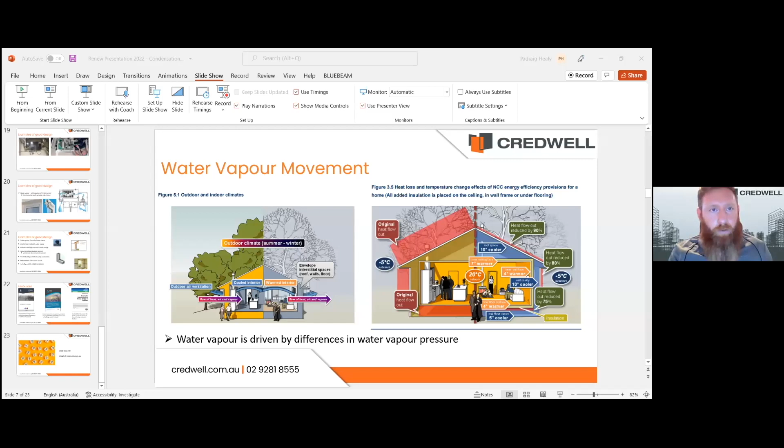So let me just bring up my slides and go through that with you guys. My name's Padraig, Paddy for short, or just to make it easier for everyone to understand and save me from explaining it numerous times, or Patrick even, the patron saint of Ireland.

So I'm director of Credwell. We started up in 2000, I came here in 2012. We started Credwell ESD in 2018. I was working here in the same capacity from 2012 to 2018 and decided to join a former director who created Credwell. We also work in the BCA access field, which is basically helping certifiers make sure the houses are designed correctly with BCA and access reports.

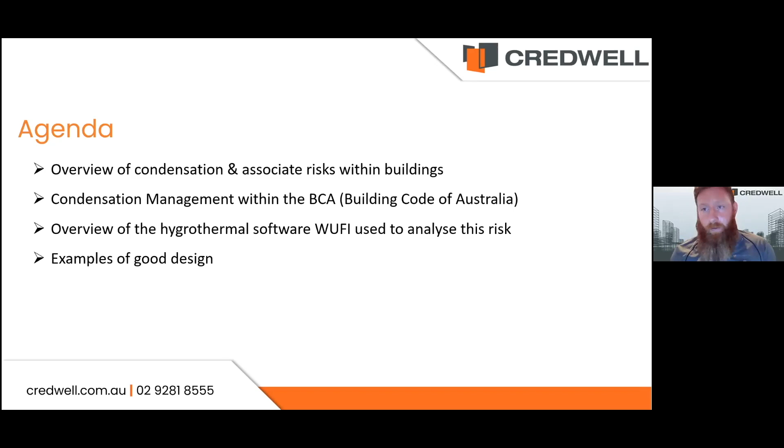So going on from that, the agenda today is basically an overview of condensation and the risks associated within buildings, what that means in the construction code. The construction code is now geared towards that - finally, in 2019, they brought in a section, F4.6, to deal with condensation. Before that, there was nothing. I will overview the hygrothermal software - I specifically use one called WUFI to analyze this risk in new buildings - and I'll go through a couple of examples of good design for you guys.

So to start it off, what is condensation? I think everybody knows what that is. It's basically where moisture-laden air meets a cold surface, and it gets to a point where it hits its dew point, and then that vapor in the air turns into condensation or liquid.

So essentially, that's easy to explain, and everybody knows examples of that. You see it on windows, for example, condensation written on that window. I remember in Ireland 25 years ago when I was in school, and it was very warm inside the school and very cold outside, we had these issues, and we were drawing on the windows in our school because of the vapor condensating on them, and they were single glazing at the time.

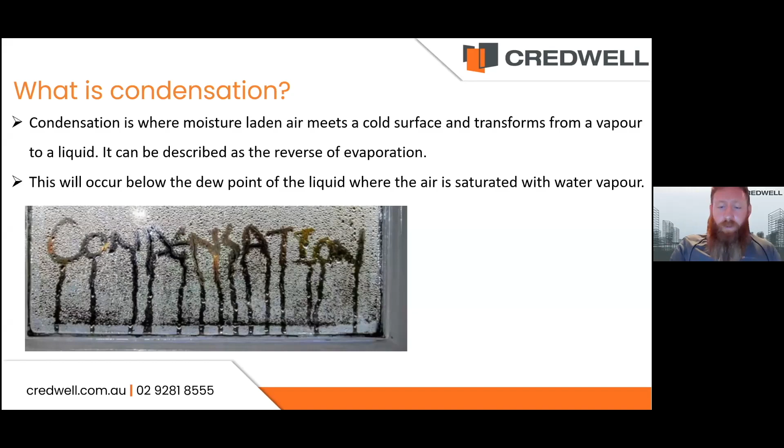So that's just a brief overview of what condensation is. There's two different types of condensation, I would say. Obvious condensation, so stuff you can see physically in front of you, like what I described on a window pane. Maybe on a wall, after a while, you'll see it build up behind it, a physical manifestation of condensation.

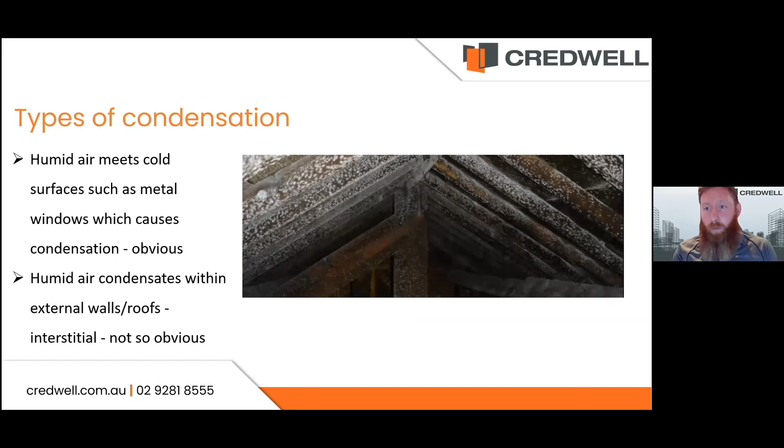The other one is not so obvious, when it gets into the wall and hides there. Water vapor gets through that wall and then condensates within the wall. That's called interstitial condensation, and that's the one we're worried about in buildings specifically. It's not something you'd see going into a building, but a lot of buildings that have been built may have interstitial condensation and we wouldn't know, because we're not sticking our head in walls every day.

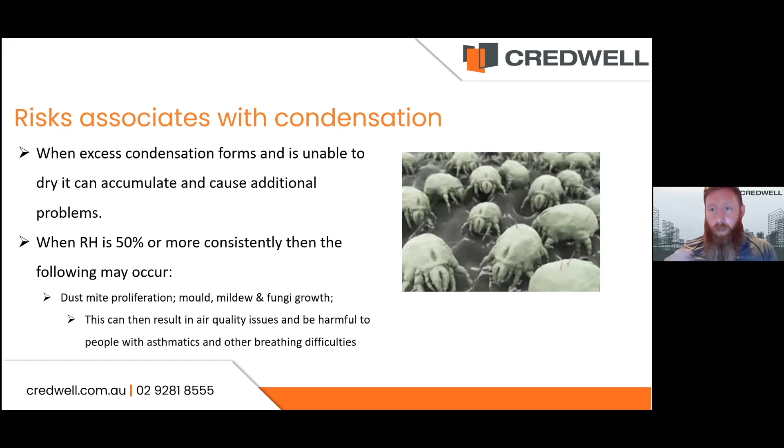Another issue with that, so mold, what's the problem with mold? Mold and fungi, if they get into your airways, can cause problems. If you are susceptible to breathing problems, you may have issues with mold. You're talking about harmful bacteria and fungi getting into your airways and causing issues. Asthma would be an example of that, it can cause or develop issues like that, or make them a lot worse.

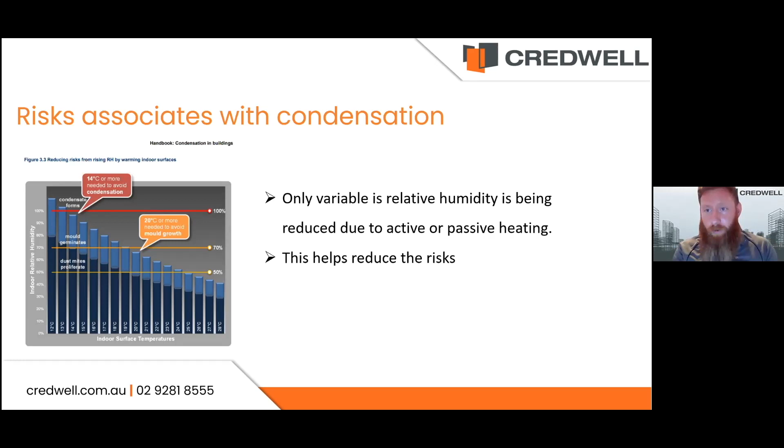Moving on. So I'd like to give an overview, as I said, pictures are better. These two examples are actually within the guide for condensation within the BCA or the NCC. These are actually in handbooks, which I give a link to at the end for anyone to look into.

You can see here, water vapor is driven by differences in water vapor pressure, so obviously like wind, it moves from places of high to low pressure. It's the same with water vapor, it wants to get in or out depending on the pressure difference. So you can see down here on the left-hand side, a cold interior or a warm interior.

When it's a warm interior inside, it basically wants to get out, and it's the opposite on the cooled interior—it wants to get from the outside to in.

The problem recently is we've been sealing up our buildings more and more to become more energy efficient. We're putting insulation within the walls and the roof, and adding better sealing. That wasn't the typical design of Australian buildings in the past, where we had quite a lot of leakage, but that was let go because it was uncontrolled infiltration that was helping towards passive cooling. Now, to be more energy efficient and meet the 2030 Paris Agreement, we're striving towards more building sealing, more energy efficient buildings, and that's why we're having condensation issues as a result.

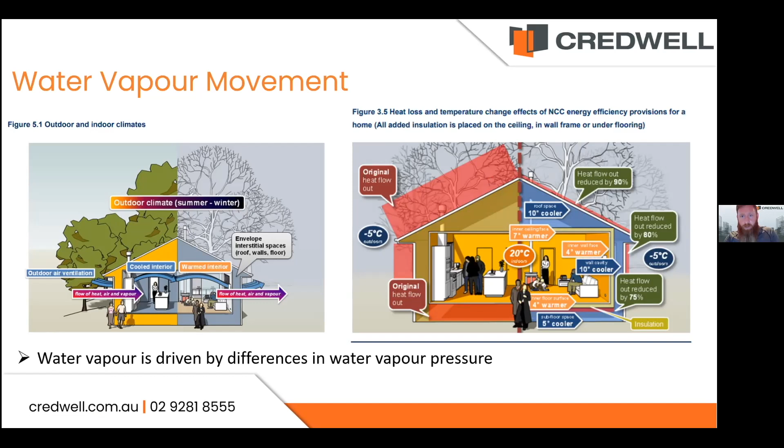So what causes water vapor? Essentially in our house, dryers, washing machines, taps, us breathing and sweating, transpiration, cooking and showers give off a lot of water vapor, and that water vapor in our house becomes humid. It wants to get out now, and if we don't give it a pathway to get out, it's going to have problems. It's going to get stuck in our walls, and it's going to condensate on our windows—this is the issue.

So we can't tell people to stop or minimize their dryers, or say get condensant dryers—I can't say the word, but I think you know what I mean. And you can't say to people to stop having showers, etc. So we need to mitigate these issues.

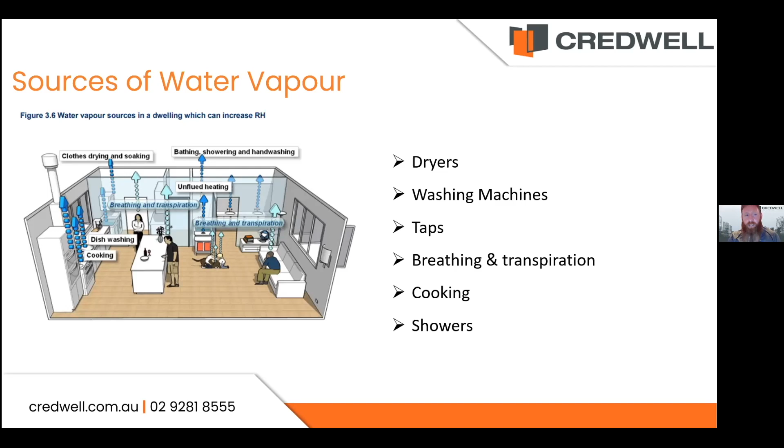So basically, the BCA in 2019 brought in Part F6 condensation management and Part 3.8.7. The difference between those two is Part F6 is for Class 2, which is units, for example, and Part 3.8.7 is condensation management within houses. So it's like everything else in the BCA—two codes, one for houses and one for units/bigger buildings, Class 2 to 9, anything from offices to shops. So it brought in this objective: reduction of risks associated with water vapor and condensation in buildings.

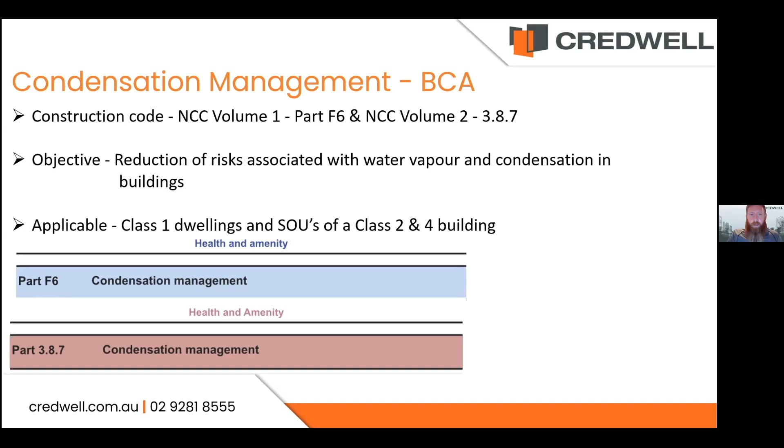So what they did was bring in two major items. A pliable building membrane, if installed within a building, should be a vapor permeable membrane in climate zones 6, 7, and 8. There are climate zones in New South Wales and Australia in general—I think there's 8 or 9 in New South Wales alone. But 6, 7, and 8—6, for example, is Western Sydney, 5 is the eastern suburbs. When you get to Bankstown and go west, that's when we're talking about climate zones 6, 7, and 8, which are down in the colder regions.

That vapor membrane needs to be a vapor permeable membrane—I'll explain exactly what that is a bit later. It also should be located on the exterior side of the primary insulation layer. Your normal weather resistive barrier that we all have on our buildings, that you see when a building's been built wrapped around it—that's your pliable building membrane or water resistive barrier, but it also needs to be vapor permeable now in these climate zones. So Bankstown West, but I'd suggest not only there—anywhere in Sydney, a vapor permeable membrane should be installed.

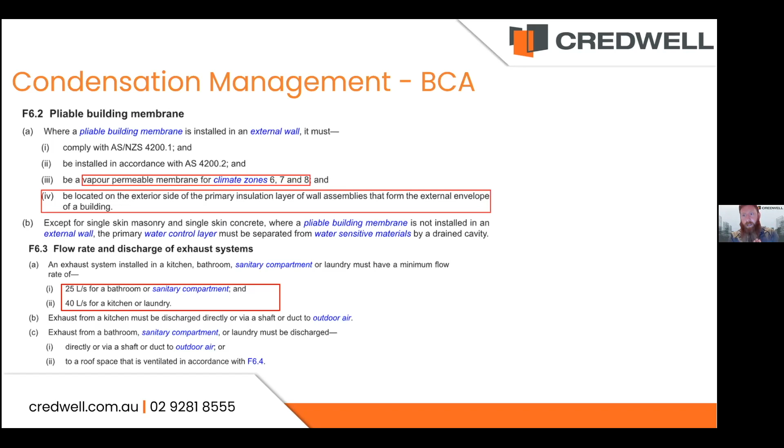Right now we need to exhaust that to the outside, get rid of that water vapor essentially. So what I was saying earlier about building membranes - it's like a good jacket, a North Face jacket, for example.

I'm not trying to promote any types of jackets. I don't even have a North Face jacket. But basically a good jacket keeps the rain out. So the building keeps the rain out. But when you perspire, the jacket also lets your water vapor out as well, so it allows you to perspire, lets you sweat - it's the same with a building.

So a good building membrane, when all that vapor gets into the building due to all the water sources within the building, the pressure difference will be able to push that water vapor out through the building completely, and it doesn't get stuck by a vapor impermeable barrier where it just hits and stays within the building envelope, or the exterior wall.

That's where we have the issues right now, where we have condensation forming on the interior side of that vapor resistive barrier. So just like that diagram there, we want all the red dots - that's showing the water vapor getting out. The blue is showing the driving rain, stopping that from getting in.

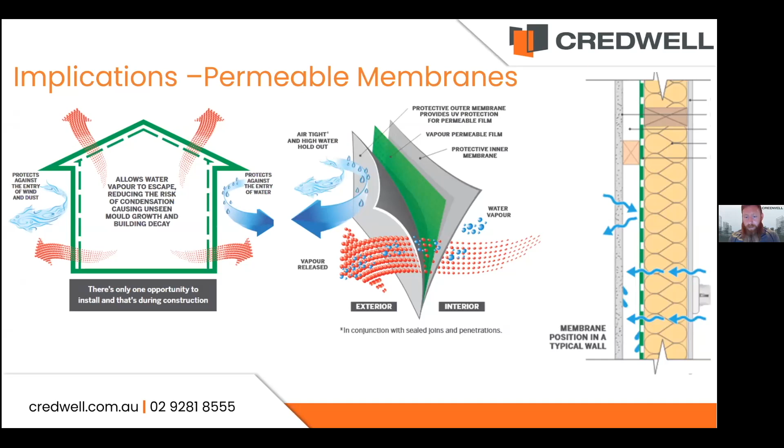That will depressurize a zone, which basically means they need to provide makeup air into that space so that it actually gets that 40 liters per second out through the kitchen exhaust. So to get it out, you need to put it in. We need to provide or supply air into the space so that it can be exhausted, and when it's getting exhausted, then it can bring through that moisture-laden air out through the building.

So as I said, point number 3 there, possible introduction of more risers in buildings to provide for that makeup air. I have a couple of examples later on as well, where you could provide that makeup air passively.

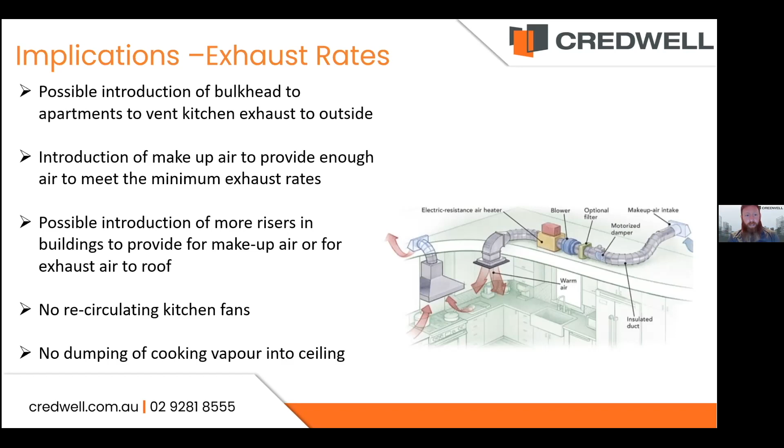There'll be no more recirculating kitchen fans. So if any of you guys are building or buying houses and you see recirculating kitchen fans, it's not allowed right now - you should get rid of it. And no dumping of cooking vapor into ceiling spaces, or exhausting of any showers into ceiling spaces. That's just terrible.

This is a bit technical, I suppose, but if you're a building certifier or anyone along those lines, you want to find out what is a vapor permeable membrane. How do I figure out I'm using the right one? Well, on the left-hand side is the definition.

A vapor permeable barrier, class 3 and 4, tells you what the vapor permeance needs to be, rating. And then on the right-hand side is a typical example of an actual product details, where it shows what classification it meets and what vapor permeability the membrane meets as well. I just wanted to show that to anyone who is actually practically building or looking at putting in vapor membranes.

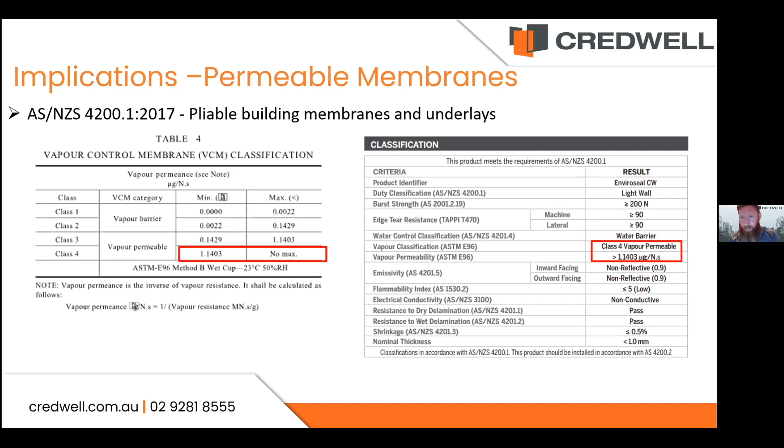So then moving on to our software. As I said, this came in in 2019. Like everything else in the BCA, you can do what's called a deemed to satisfy approach, which is a clause by clause approach to complying with the building code. So it's like a recipe for a cookbook - you do this, and this, then you comply.

Or you can also comply by using performance solutions or software modeling. So it'd be like a JV3 report for section J. For this, for example, it's called an FV6, a condensation management report. It's basically allowing you to use different membranes, to put in different products in the wall to assess how well that wall or roof performs against condensation and mitigation of mold growth, etc.

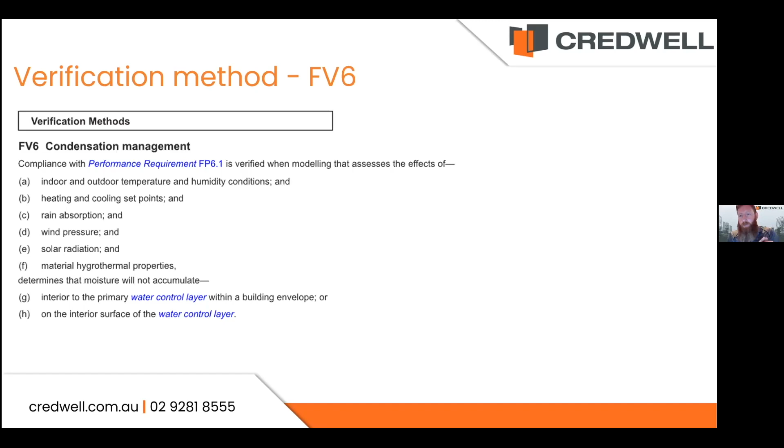Within the wall, you can see here a list of all the items that the software looks for. Now, there's more than one software, but the softwares that we use need to meet all these criteria. This is an example of one of the softwares that we use.

We then tell it we need to saturate those elements, as if it was pouring rain on the building. This is worst case scenario. We have to design for the future longevity of the wall, and see how that vapor and moisture gets out of those building materials. So we run this analysis for 10 years - you hit the button, run it, and see whether that moisture gets out of the wall.

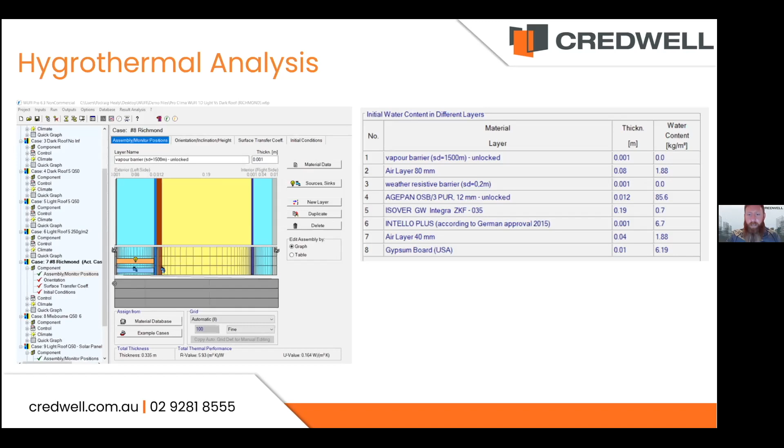My wife gave birth recently, and I was watching the heartbeat of the baby. I couldn't stop looking at it - I was like, oh my God, hopefully that keeps going. But you can see it's a bit like that.

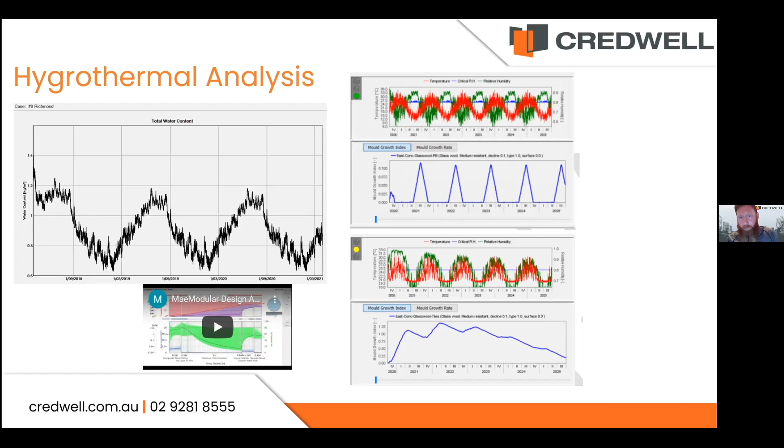I have a video as well that I can show you guys just quickly on the outputs. So I'll run this quickly here.

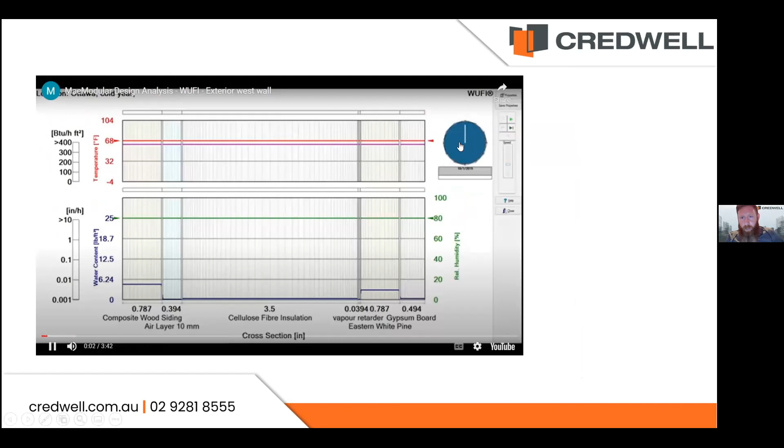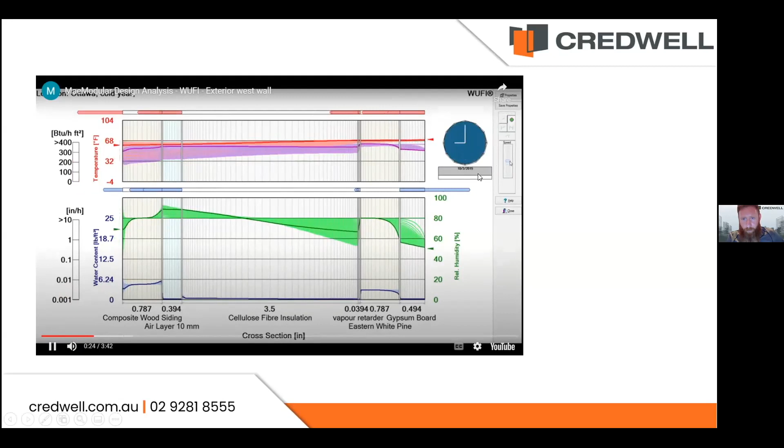This is the software - you click play essentially on it. This guy talks for a bit and it hits play, and you can see it moving from 2015. That's the clock, he's winding it up slowly. March, April, May - you can see here the different relative humidity, and the solar radiation in red hitting the building. On the bottom there, the blue lines show the actual water content and where it's resting.

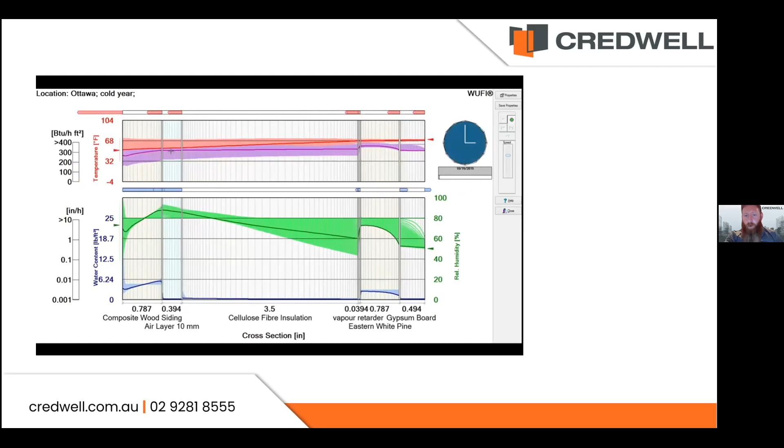I don't want to get into too much detail, it's very technical, but the more blue on the bottom right-hand side - left is outside, right is the inside of the building - the more moisture we build up behind certain layers, the worse it is. So we try not to get moisture build up within these layers. Essentially, this is what we're doing.

Moving on from that, I think we can click outside. We get into, I suppose, the interesting area - examples of good design.

I suppose a lot of you have heard of passive house. If you're interested in ESD and the growth of passive house, it's not growing as quickly as I wanted in Australia. People argue that it's a great climate here already - why do we need passive house? Does it work as well in New South Wales, better in Melbourne? That's a different argument for another day.

Passive house is a great design. One of the elements of passive house is what's called continuous ventilation - a heat recovery ventilator or an energy recovery ventilator. Essentially, it's controlling the amount of air change rate within the building, so you can actually control that.

So we seal up our buildings perfectly, well, as best as we can, and there's a test for that - a pressure test, a blower door test. You get that test, and then you put in a heat recovery ventilator, which basically draws the air from the inside out and draws the outside air in, and passes it through a heat exchanger.

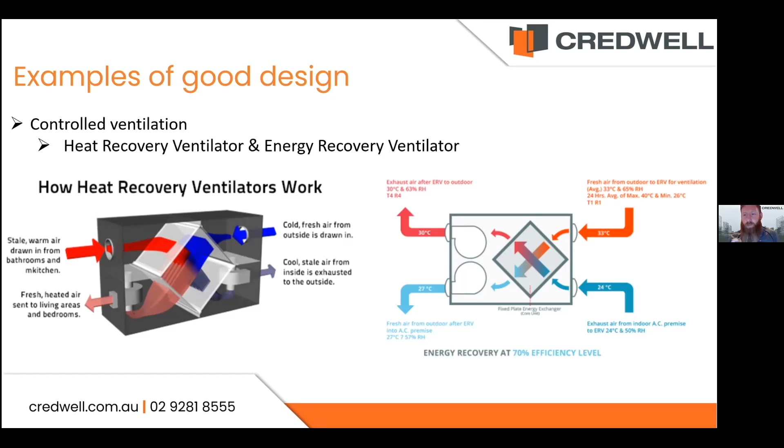Like I said to people before, it's like designing for building on the moon or building on Mars. You take complete control of your environment with this sort of setup. So that's an example of good design, but this has to work in tandem with good sealing of buildings. You can't have a leaky building and use this as well.

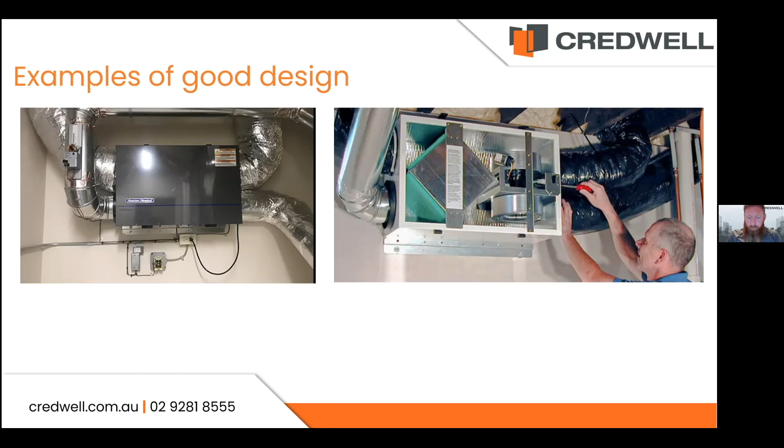There's actually filters in this one. There's dampers for noise in this one. And it also then lets that air in. So the idea of this is that it's also a control. You would put this in a room that has a shower, or a window beside a shower. You flick it open, if you remember to do this, have your shower, and provide that makeup air for your exhaust. You may leave it open all the time if you don't feel it's causing any comfort problems. So yeah, it's these trickle vents.

They're becoming more and more popular, and we're trying to convince people to actually put them into the design of their houses, so they consider trickle vents. Now, you don't have to put a trickle vent in every single window in your house, but for the main areas like the shower, where there's a lot of moisture buildup, you would want more control of that.

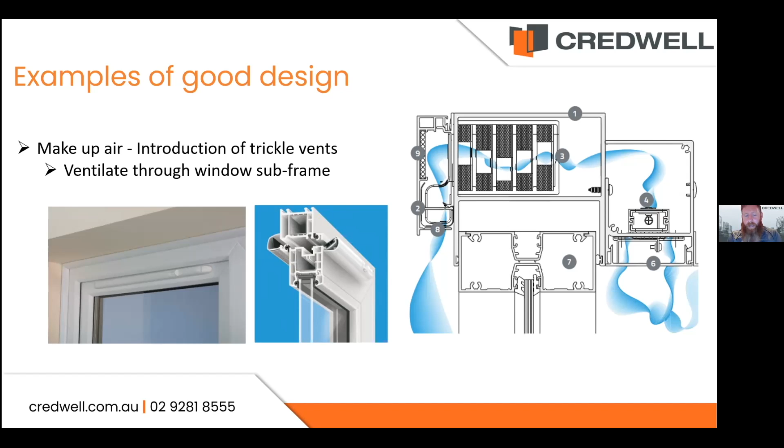We want to have double glazing windows. So we want to stop that contact between a really cold surface and really moisture-laden humid air, and it condensating. So if you have two panes of glass, that will not happen. So we want double glazing. We want thermally broken frames.

A thermally broken frame is like that picture that shows the glass in the frame there. If you look at the frame, you can see a honeycomb structure in that. The finer that is, the more efficient your U value, or the more efficient your frame is, essentially. So we want to have good thermally broken frames. We want materials with high moisture content storage.

So what does that mean? It's part of the modeling process that we go through. We pick materials, for example, that have high moisture content. Wood has good moisture storage. It's natural. Wood contains moisture, it holds it well, and then releases it well also. Rather than having a stud wall in metal, which does not hold moisture and does not get rid of it. Although the issue with wood is mold can grow on wood, so that's why we need to assess that it works also.

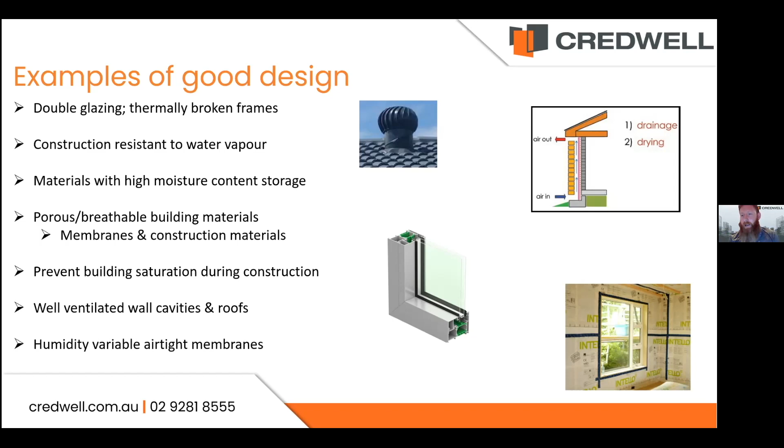Yes, thanks, Padraig. That was very comprehensive and interesting. It's a challenging area, so it's good to get a good understanding of it. We have at the moment 10 questions, so we'll try and get through them. There's one from Simi, which has come in several parts, so I'll combine them into one.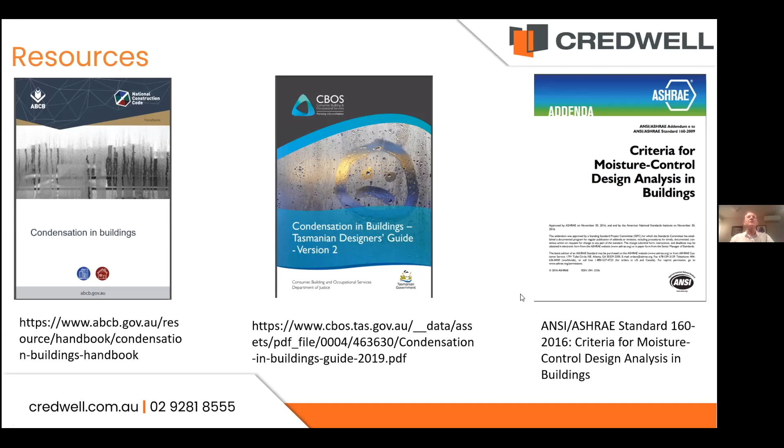Simi's asking, if you're making a dwelling out of shipping containers, what insulation is best? She has been recommended to use closed cell spray foam with 15mm Ecoply on top of that. Your thoughts, please? Yes, I would actually. So as I mentioned earlier, you can design buildings to be vapor permeable or vapor impermeable, but you pick one. There's no other option with this metal.

I think you need to have a vapor impermeable building, but then manage your moisture in other ways. Like I said, make up air, get it into that building and exhaust it. So the foam is actually really good, because with the corrugated iron, as you know, it comes in waves, and the foam will be able to move into those cavities nicely for you. The only thing I would say is that sometimes it doesn't have as good an R value compared to some of the other products out there.

It's still great. I mean, it's all insulation. The R value is what we're looking at. The R value is the resistive value to heat transfer, so the thicker that is, the better. The thicker you make that spray foam, the better it will be. And you don't want those cavities, because there's other issues there as well, with things getting in there, creepy crawlies might get into it.